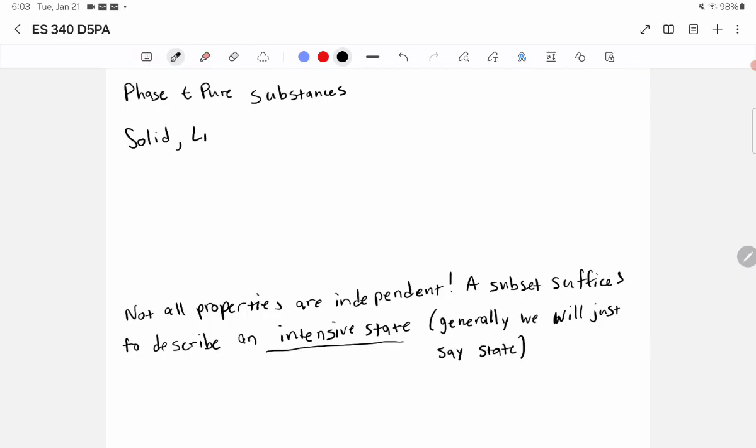There are now other accepted phases, but these are the common ones, and these are what we will be dealing with in the course.

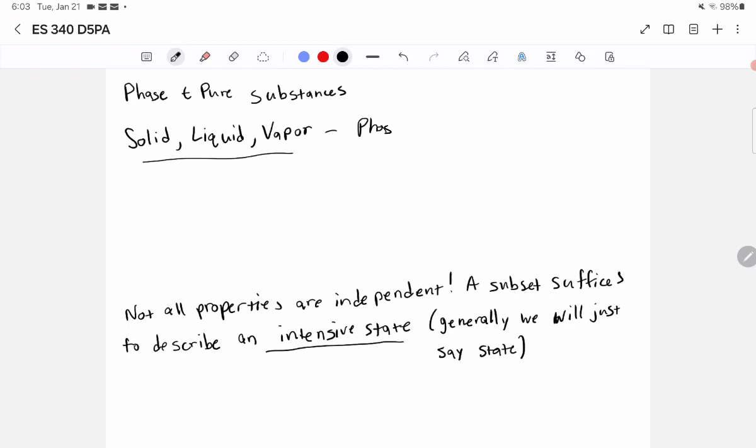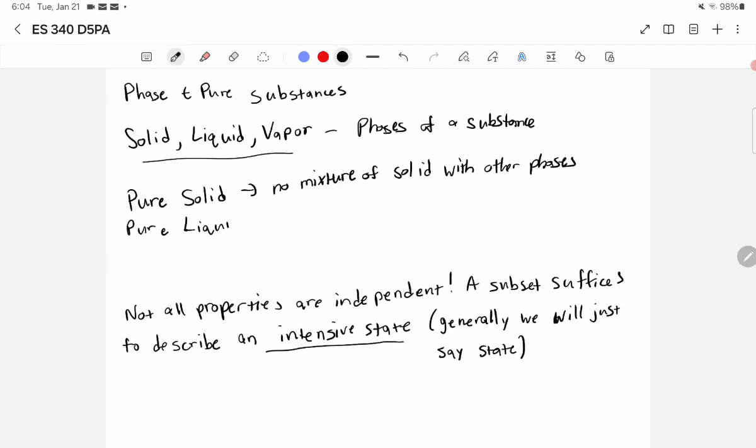When we say that something is pure, what we mean is that it is uniform in the sense that it's all in the same phase. So if we say pure solid, that means no mixture of solid with other phases. Pure liquid would mean, again, no mixture of liquid with other phases, and so on. So when it's pure, there's no mixture of phases.

Now, we can have cases that are not pure, so we can have mixtures of phases. In fact, in some very special circumstances, we can even have all three of those states mixed together - the triple point, where it's solid, liquid, and vapor all mixed together. But that, of course, takes very special pressures, temperatures, and volumes.

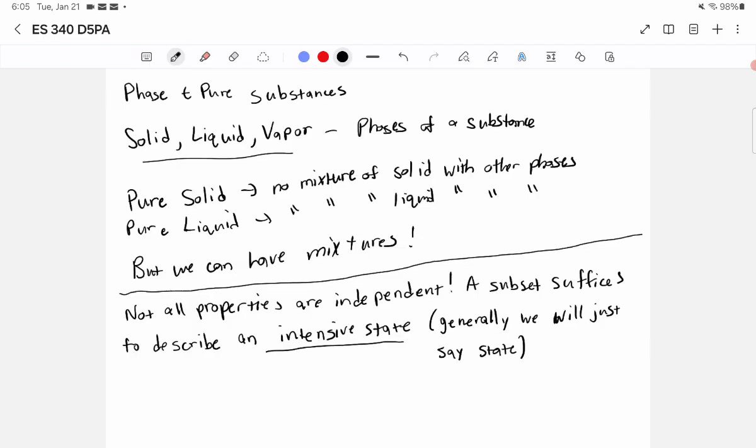Now, one thing we have to note is that not all properties are independent. In fact, we're going to be talking about intensive properties specifically. So intensive properties include things like the temperature, the pressure, and the specific volume. The specific internal energy is another example. Specific enthalpy is something that we'll see.

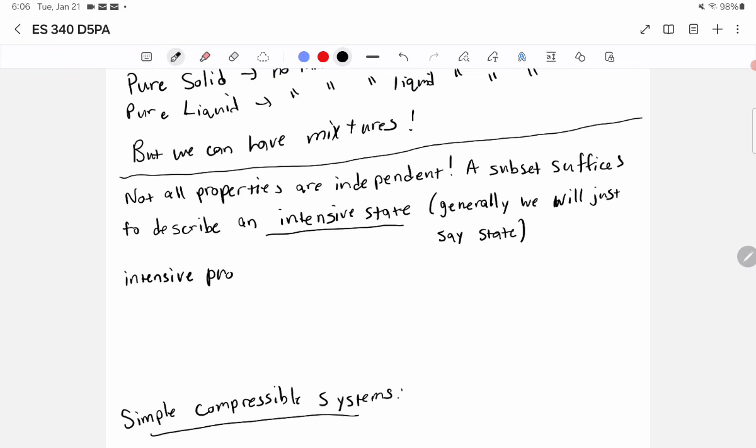Intensive properties include temperature, pressure, specific volume, specific internal energy, and specific enthalpy. We haven't talked about enthalpy yet, but we'll get there. These are examples of intensive properties.

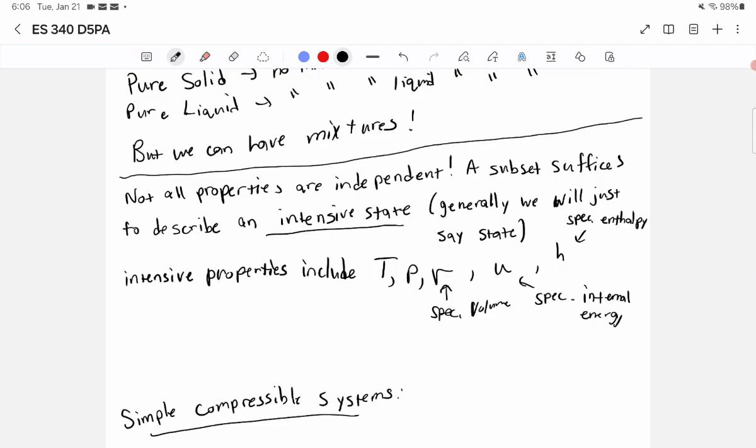And what we're often going to be interested in is something called the intensive state. The intensive state is something that can be described by the intensive properties of the system. So that's what we mean by not all properties are independent - not all intensive properties are independent.

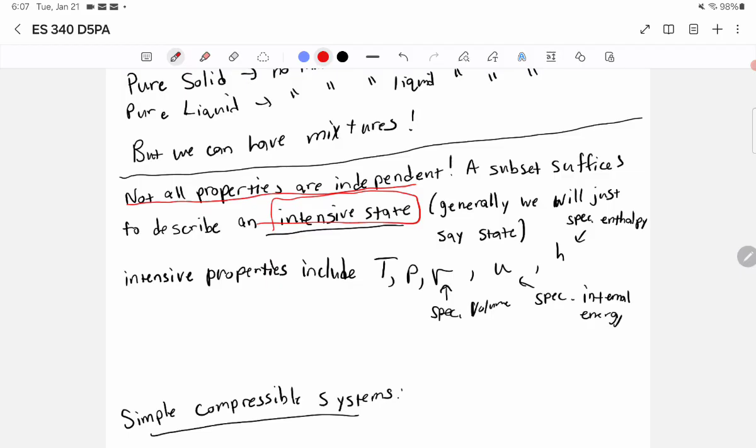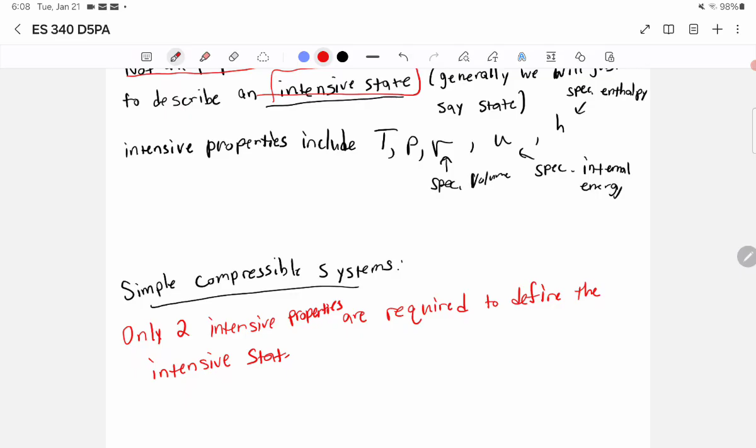In fact, in a special case that we call simple compressible systems, only two intensive properties - excuse me, I was using the wrong word there - are required to define the intensive state in a simple compressible system.

Now, it's important to note that we're generally going to deal in this course with simple compressible systems, but not everything can be considered a simple compressible system. In fact, you will probably encounter such systems that are not simple compressible in courses like fluid mechanics. But in this course, we will generally deal with simple compressible systems, which means all we need to know are two intensive thermodynamic properties. We only need to know, say, temperature and pressure as an example, and that will determine the entire state of the system just by knowing those two properties.

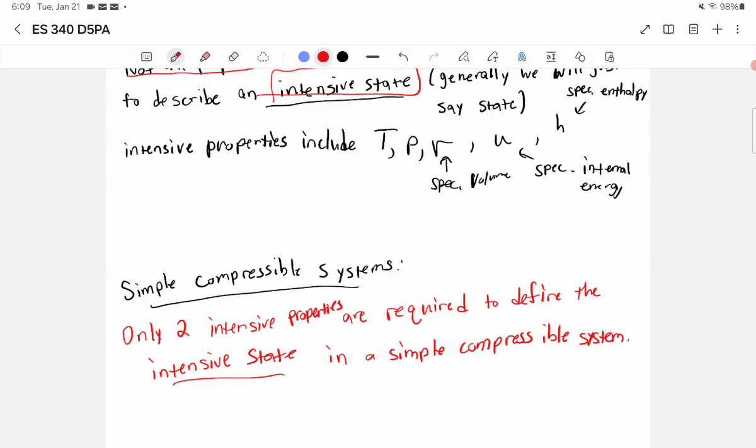So in a simple compressible system - so that's what we will be dealing with here. Now, in a simple compressible system, this is the reason why we like simple compressible systems. Again, this is just a simplification - this is not the real world, but in some cases it's close enough.

In a simple compressible system, work generally happens during quasi-static processes. So we can assume that we have an equilibrium at each state. When we have a quasi-static process, it's also called quasi-equilibrium - we can assume that at each intermediate state, in between the start and end of the process, we go through equilibrium points. That's the nice thing about simple compressible systems, and that makes computation much easier in such a system, as we'll see.

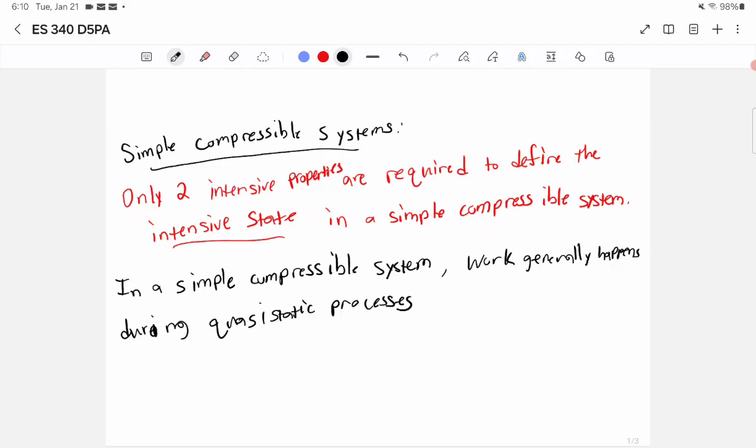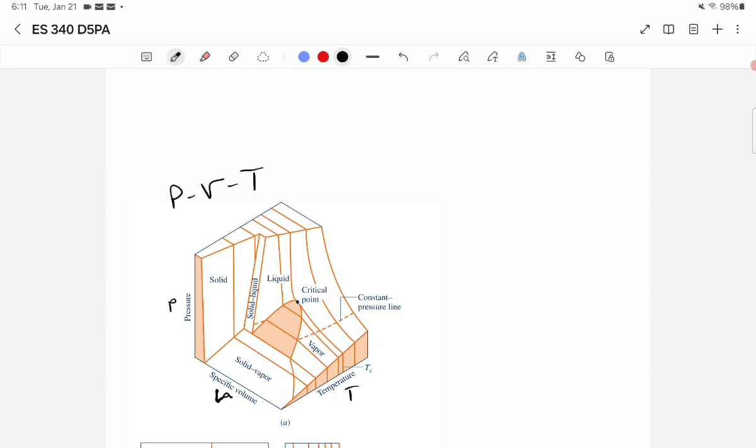Okay, so now we're going to talk about the PV-T relation - oops, I meant to make a dash here - where P is the pressure, of course, V is the specific volume, and T is the temperature. Your textbook uses a lowercase v for specific volume, and I'll try to match that as best I can. I actually make something that looks more like a mu, or a nu, I mean, but close enough.

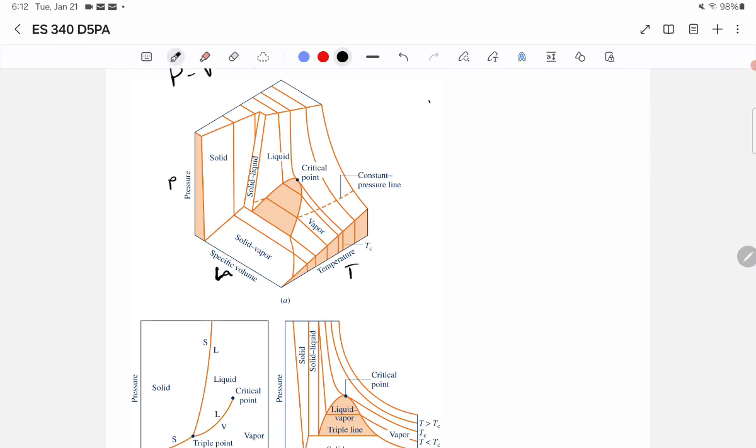Okay, so again, remember that all we actually need are two intensive properties to fully define the state, because we're going to assume throughout most of the book that we're dealing with simple compressible systems. And so we only need two properties, but this is a plot of three properties against each other.

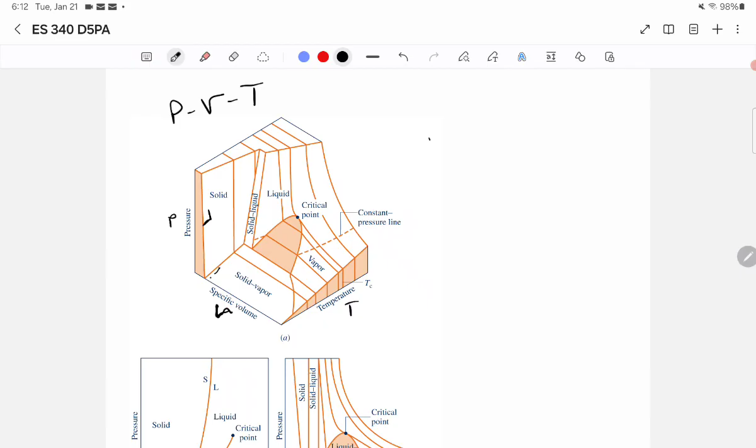You can see some details here: when the pressure is low enough and the specific volume is small enough, we're in the solid range, and the temperature is small enough. Temperature's here, the specific volume is here, and the pressure is here. So when these are relatively small, even under high pressure, it stays solid—it just keeps going up. But when volume and temperature are relatively small, we're in the solid state, which makes sense, right?

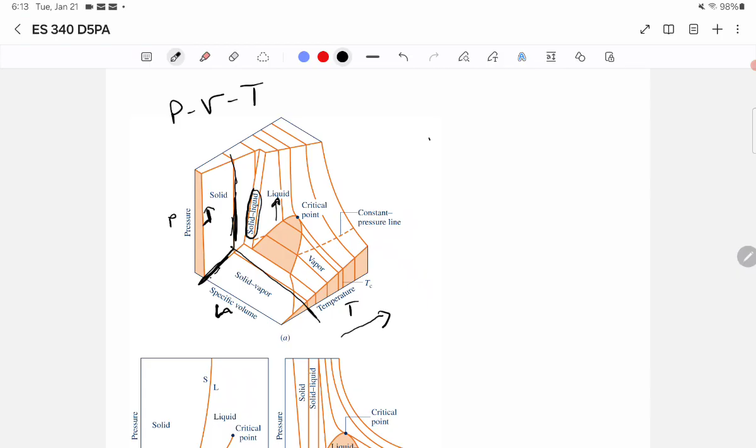Because solids tend to be packed together much more than liquids or vapors—they're denser. So when you have a smaller volume and a small enough temperature, it's in the solid state. But as the temperature rises along this axis, we go through the solid-liquid state, then we get to the liquid state, and then, depending on the volume, we get into a vapor state. So increasing the temperature and allowing the specific volume to increase, eventually we hit a vapor phase.

This all kind of makes sense probably from experience. You could think of something like water: if you cool it off enough, the temperature is low enough, it's solid; then you heat it up, it becomes liquid; then you heat it up more, it becomes vapor.

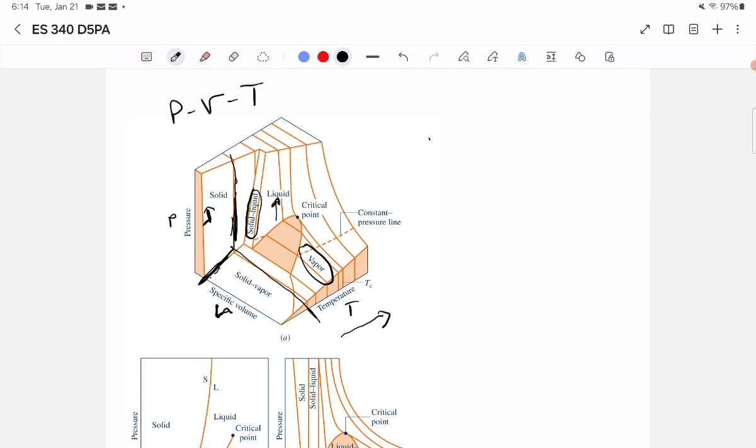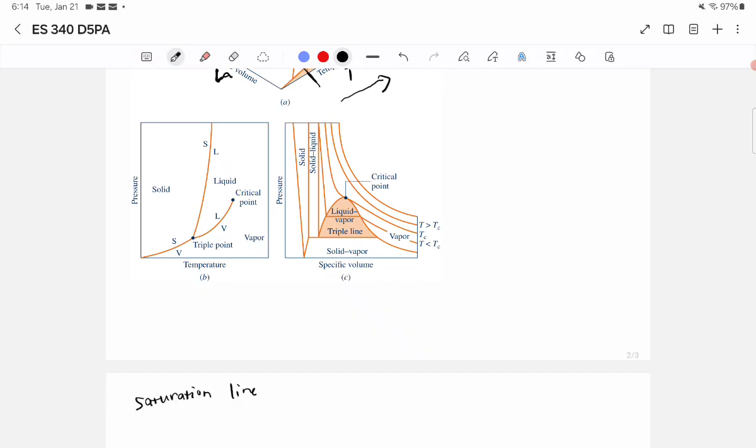But what we're really going to be interested in is not this triple diagram, but pairs of intensive properties. Because in a simple compressible system, that's all we need—pairs of properties—to entirely define the state.

Now, I mentioned something interesting here. This is a pressure-temperature diagram, called a PT diagram. It has another name as well, but we're not going to go into that yet. The PT diagram is nice because it shows something called the triple point, which is that exact place where all of those phases coexist—you can have solid, vapor, and liquid.

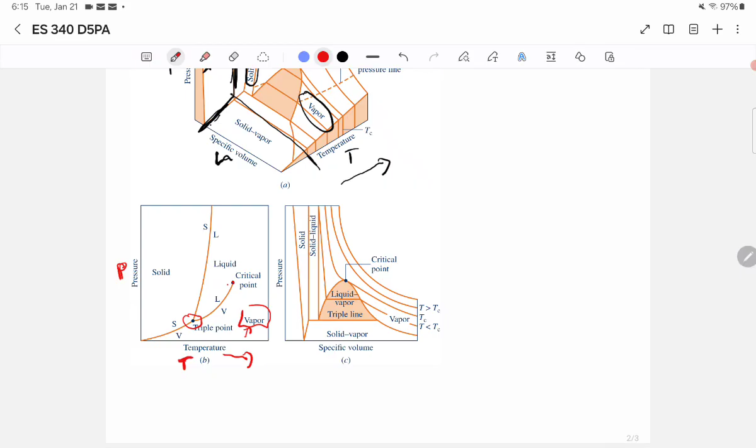Notice if the temperature gets larger over here, we get into the vapor phase again. This critical point is kind of where things get separated out—this is where you separate between, say, vapor and liquid. Over here, when the temperature is lower, we are in the solid.

And we also have to have a high enough pressure—notice that when we have a high pressure, even at higher temperatures, like over in here, we can still have a liquid. As pressure gets bigger, we can still have a liquid. You can imagine, if I carry this line through, you can still have a liquid over here even as the temperature rises, because the pressure is enough to hold it together into a liquid form.

But at low temperature and reasonable pressure, we have a solid. So this makes sense in the PT diagram. We're not going to deal a ton with it, but we will deal with the PT diagram. What we're really going to deal a lot with is the PV diagram—the pressure and the specific volume.

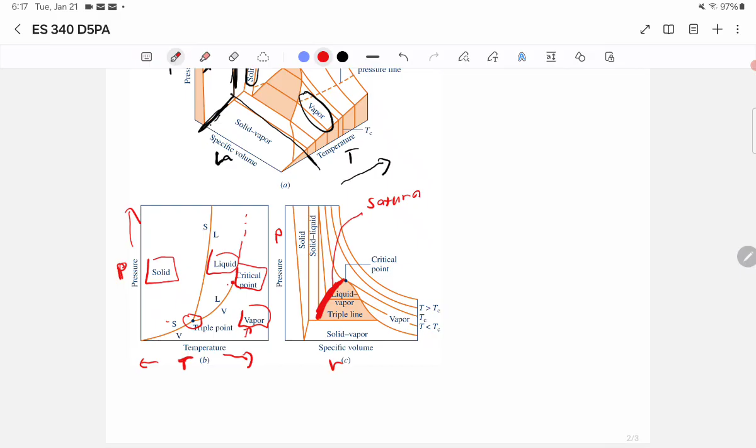In this case, we also want to identify places where we have vapor, liquid, and so on, and furthermore identify very special parts of this diagram. So this diagram, where I'm marking in red—I'll make it thick—right up to the critical point: if I'm on that line, not on either side of the line, but on that line, this is the saturated liquid line. This is going to be very important, so pay attention. That's the saturated liquid line.

Over here that I'm marking in blue, just past that critical point—the critical point is where they coexist—this is the saturated vapor region.

And then in between, let me use a different color so we can distinguish. In between this region and here is where it's a mixture of vapor and liquid—a liquid vapor mixture. And furthermore, if I'm more to the left, I'm in this region: if I'm closer to the left side, I have a larger amount of saturated liquid. If I'm closer to the right-hand side, I have a larger amount of saturated vapor. And in the middle, of course, I have exactly equal liquid and vapor. So you have to keep that in mind.

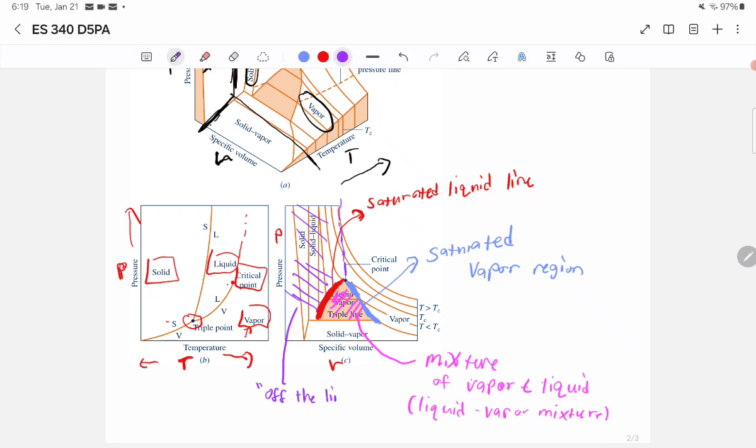Now, over here is something interesting—let me change the color again, maybe to purple. Over in this region, on this side, if I'm off the line—and I'll make a little dash line at the critical point here—so if I'm off the line, and I'm on this left-hand side, this is called the compressed liquid region.

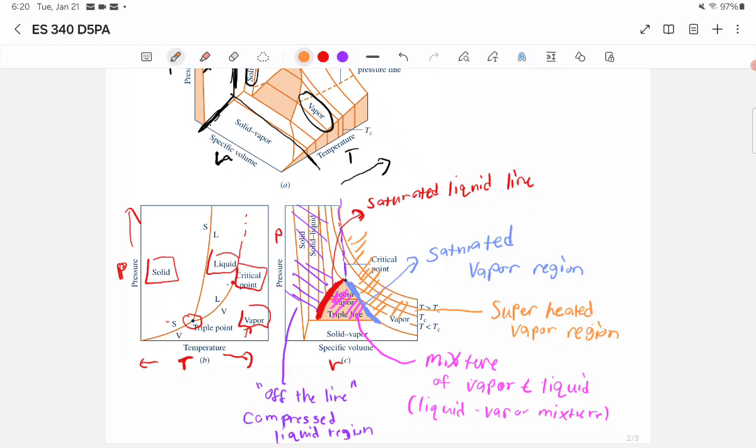Let me change this color to orange. When I'm off the line, over here, past that dashed line, I'm in the superheated vapor region.

On the line, saturated vapor, that blue area, saturated vapor. But off the line, I'm in the superheated vapor region. This is going to be very important that you familiarize yourself with this diagram, because we are going to use this as the course goes on. I suggest you take notes and come back to it later to make sure you understand what is going on.

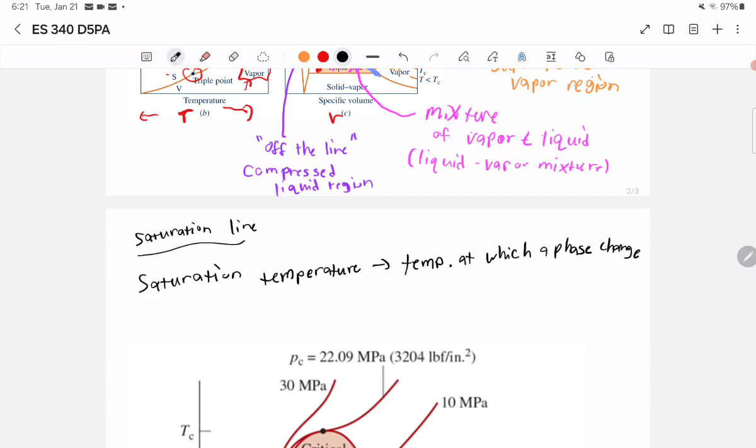So I discussed the saturation line and all of this. I should discuss what I mean by these things. So, saturation temperature: this is the temperature at which a phase change takes place. In this PV diagram, the saturation temperature would be the temperature that we start at when we get to that red line.

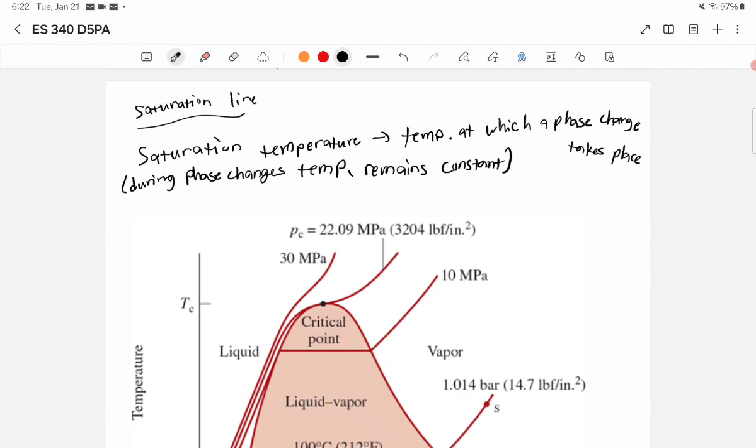However, during phase changes, this is important: the temperature remains constant. I want you to pound that into your head. And also that's true of the pressure. So as I go across this PV diagram, the saturation temperature is constant. It's the same temperature from red all the way over to blue. Once I get off of that, then the temperature changes.

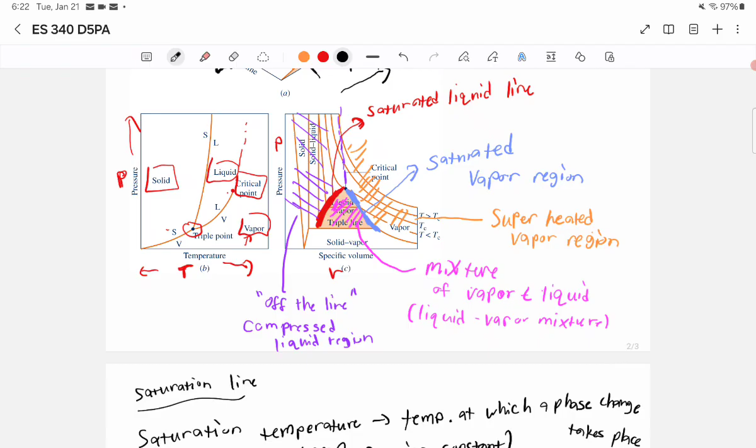Now you can also say the same thing about saturation pressure, and it's the same idea as the temperature. It's the pressure at which a phase change takes place. So it's the same thing, and it's also constant during phase changes.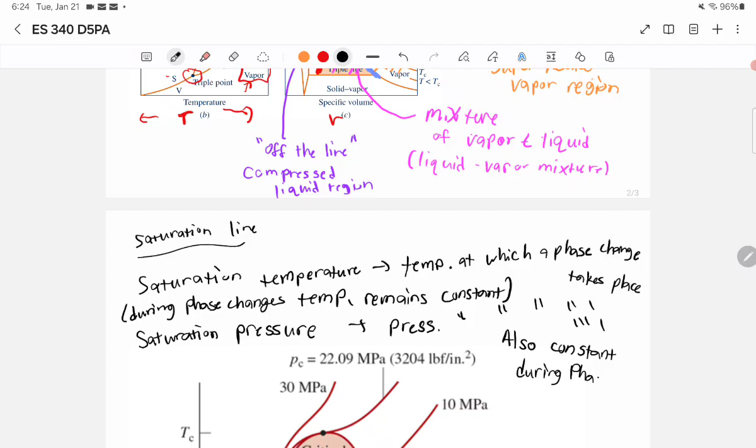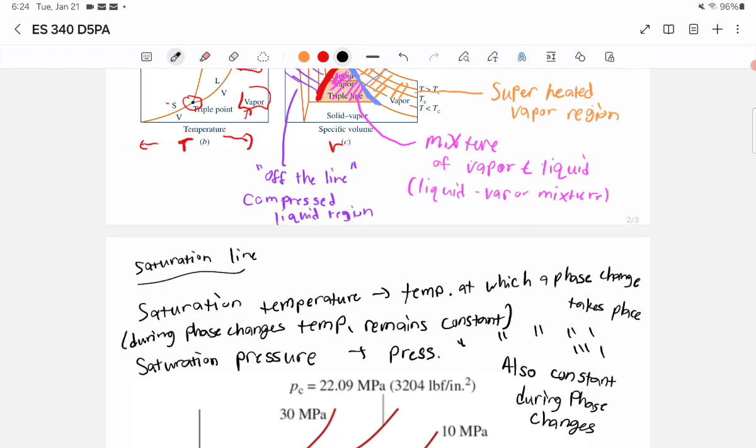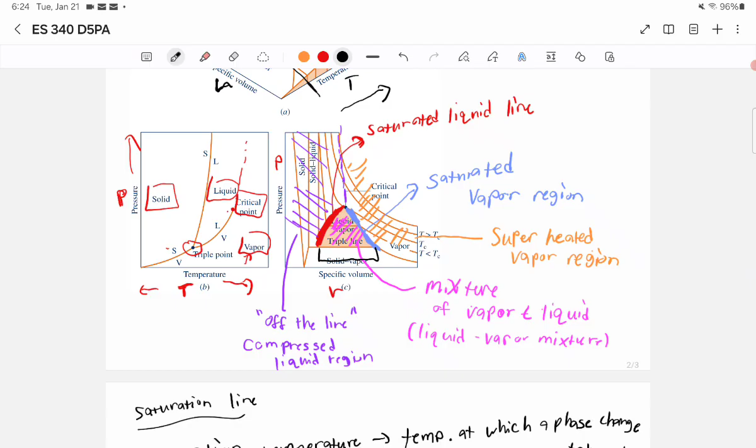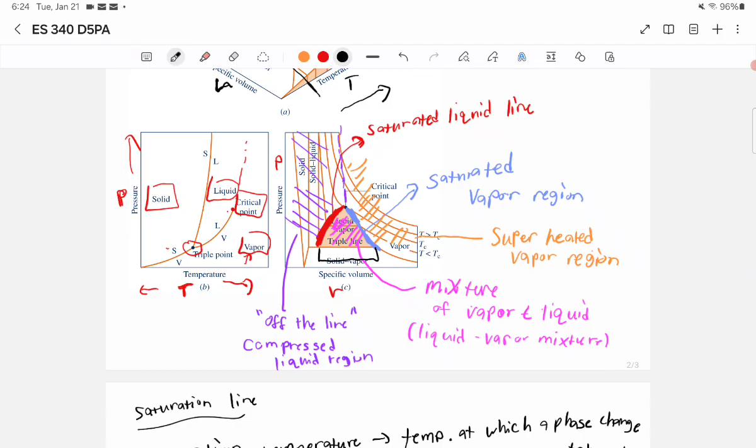That's important, but notice one very specific thing about this. You might ask, what changes? Because typically during a phase change you're adding heat, so you'd expect something must change. We can actually see exactly what changes on the PV diagram: going from that red line to blue line, the temperature stays the same, the pressure stays the same, but the specific volume is increasing as we go from liquid to vapor, or decreasing when we go from vapor to liquid. That is what actually changes here.

Now we also have the TV diagram, and we will use this one too. In fact, this one might be the one we actually use the most. But the idea is the same. Notice that we have a liquid vapor here. This side of the curve is actually exactly the same as the PV diagram.

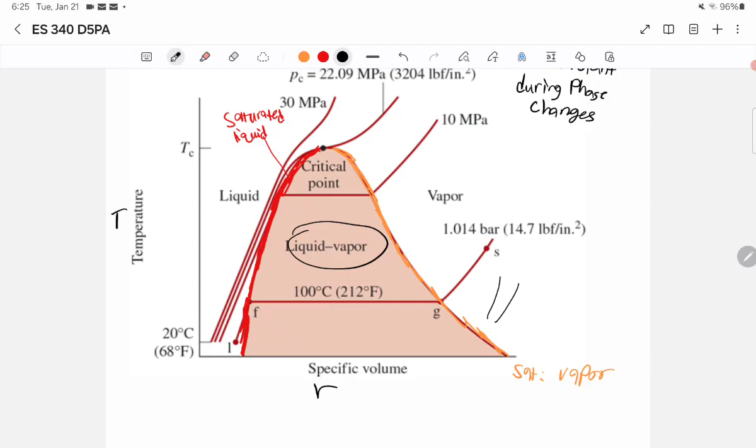This side of the curve, we have a saturated liquid. This side of the curve, we have a saturated vapor. Over here we have superheated vapor.

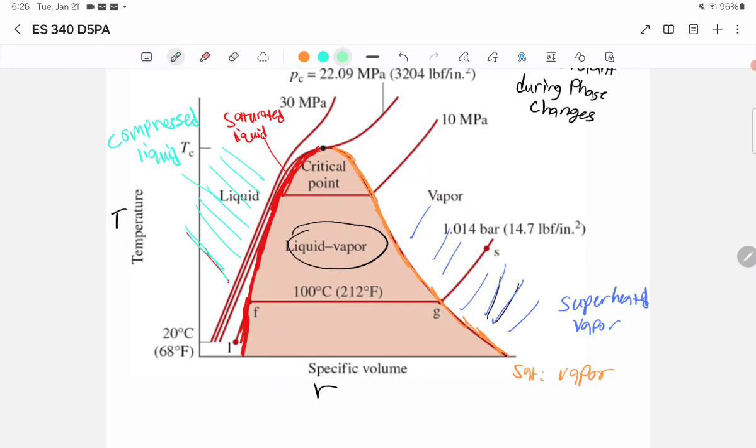Over here, in this region, we have the compressed liquid, and in between we have the mix. So it's just like the PV diagram. It's not the same as the PT diagram, but it is the same as the PV diagram. So it's a mixture in there, liquid vapor.

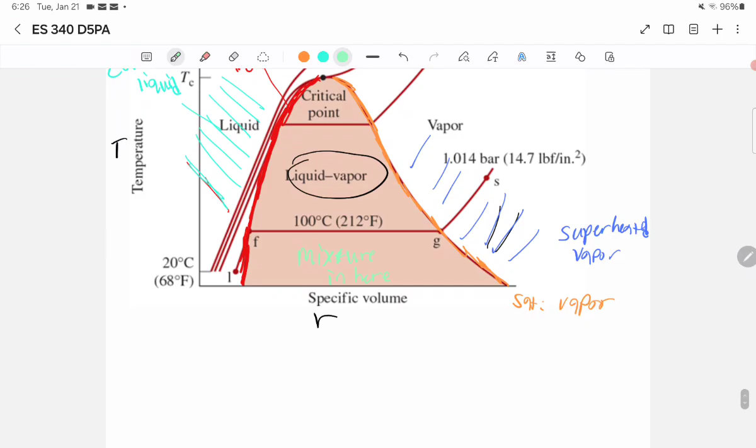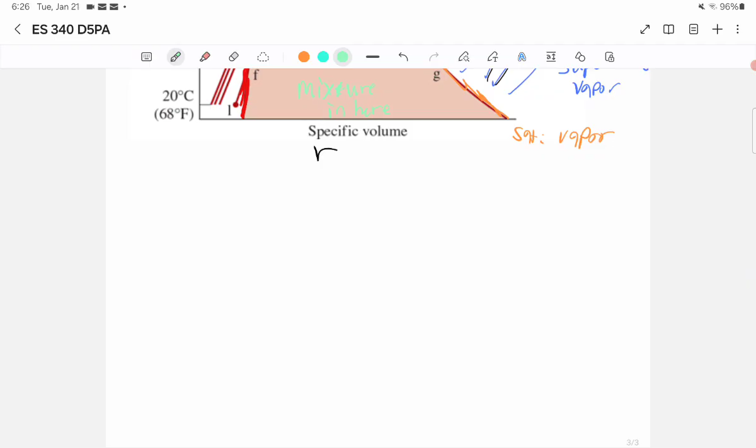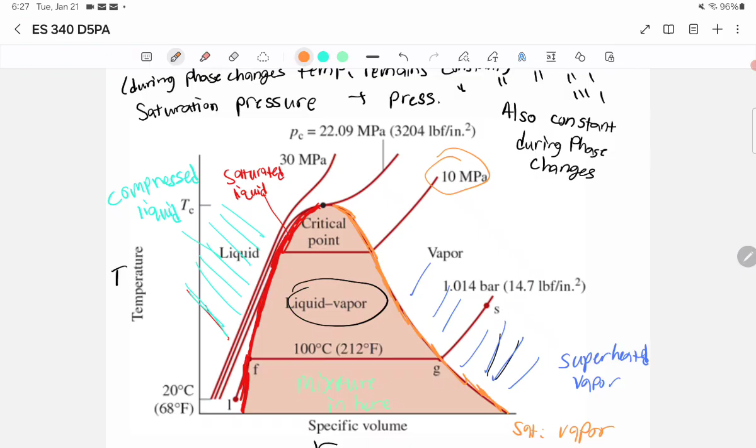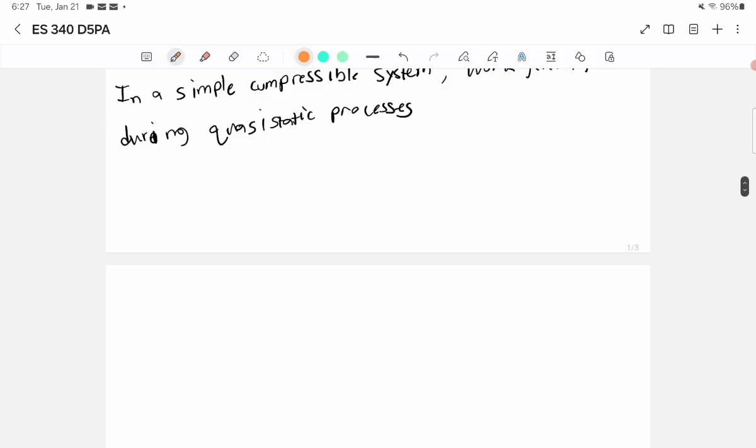Again, this is going to be important. This one, obviously, we're going to use a lot for the purposes of this course. Now, these lines on the T-v diagram are lines of constant pressure. Notice that T-v has no pressure on it specifically, so we like to show how it would look in a 2D case versus a 3D case, and without having to use the 3D case, this is how we express it. So these are the constant pressure lines.

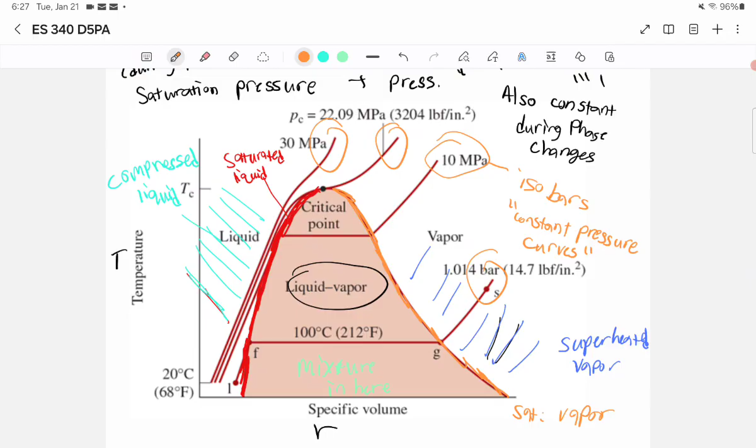These are also called isobars, constant pressure curves, I guess, is the better word. Those are our isobars. And this is going to be a topic we use over and over again, because this will tell you which table you should use. Should I use the compressed table? We're going to call them the steam tables. Should I use the superheated table? Should I use the saturated table, which would be anything on the curve or in between? So the mixture, or saturated liquid, saturated vapor.

Being able to identify things on here, where things go, is very important, so I want you to take time and learn this. That's all that I have for this video. I have another one coming soon.